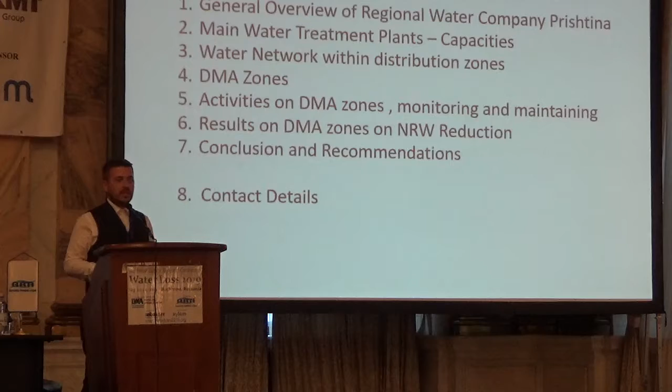As you all know, or somebody may not know, Kosovo declared independence in 2008. We are in the middle of the Balkan region, on the border with North Macedonia, Serbia, Albania, and the rest. As a small country, we are divided into 7 regions geographically, and based on this, the water utilities have also been divided. So the water utilities in Kosovo are only 7, and all of them are regional water companies.

In 2007, we became a regional water company. In 2017, we finished rehabilitation of a water treatment plant in Badovc, and we inaugurated a full construction of a new water treatment plant in 2017. Luckily, since March 2017, Pristina is getting water 24/7, because unfortunately in the past it was not possible to meet the water demand for the capital city and other towns or small cities that we are supplying.

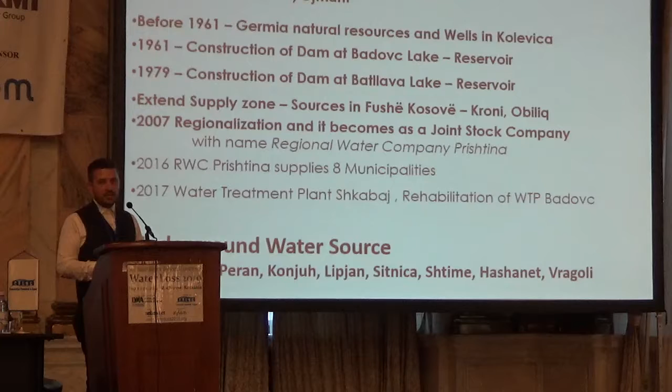Currently we supply 8 municipalities, including the capital city of Pristina. We have quite good coverage with the water supply system. 96–97% of the population within the Pristina region are getting tap water, piped water, and regarding sewage, we are at 88% coverage with the sewage network, but unfortunately we don't yet have a wastewater treatment plant.

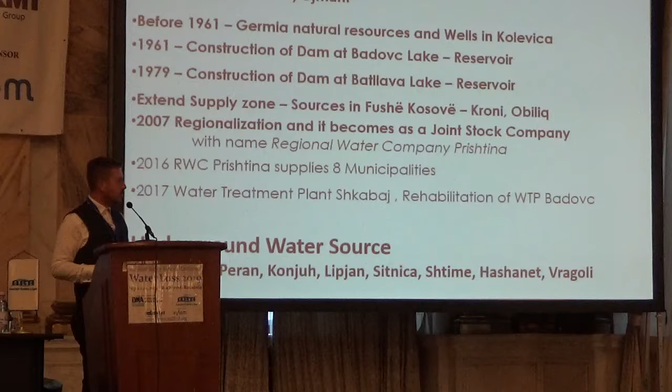As I mentioned, we are using 3 main sources. Gazivoda or Ujmani Dam is located in the north of Kosovo with a volume of 350 million cubic meters. We are importing from this source 700 liters per second. Also, we have Batlava Lake, from which we are getting 900 liters per second, and Badovc, from which we are getting 520 liters per second. So these are the main sources.

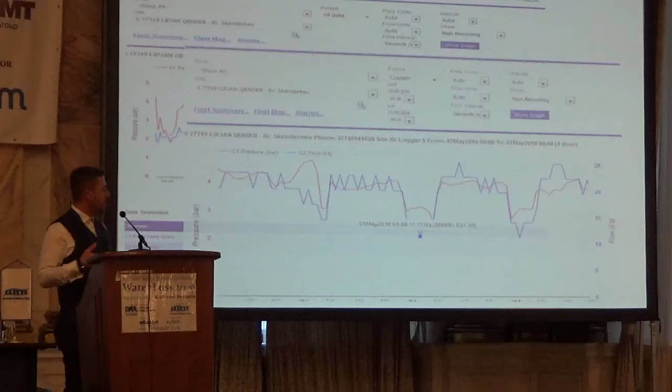Initially, it was 22.22 liters per second. After the steps that we took, within 4 months we achieved 11.11 liters per second. And with this, we were able to define where the minimum night flow is on the chart and where the peak flow or maximum flow is.

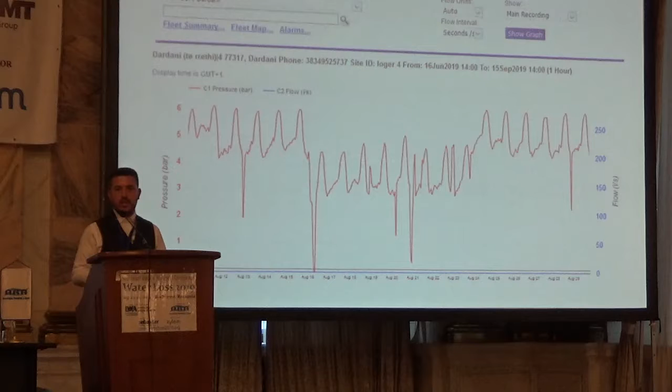Another good experience from online monitoring is also pressure management. When we face troubles in the network, it's quite easier now and quite quicker to find the problem and to pinpoint or to locate. This is one of the cases. It was quite recent, as you see from the date here. It's 16th of June. We had a drop on the pressure after a pipe burst from one of the contractors on the field, and then we start to see.

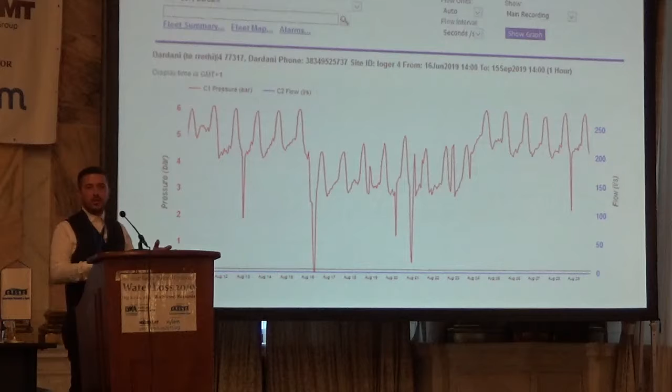So within a week, more or less, we surveyed all the network, and we found out that it was a leak caused close to one of the sewage manholes, but never appeared up, and it was quite impossible to detect even with the noise loggers, because it was a continuous flow into the sewage. What we did, I'm pretty sure that everybody knows much more than I do regarding this one. We were working during the night and trying to pinpoint or to locate the leak.

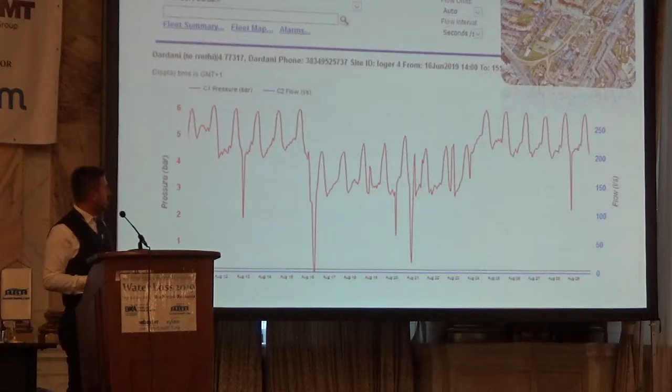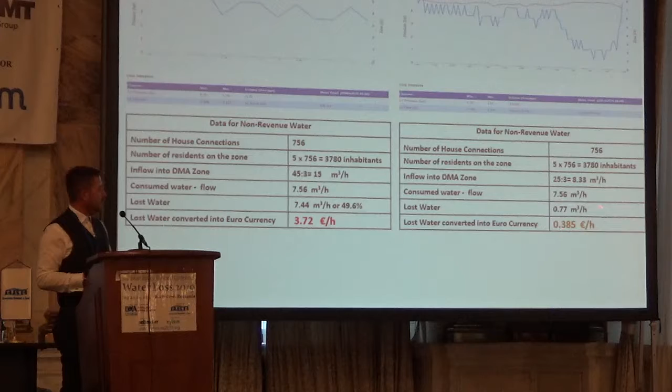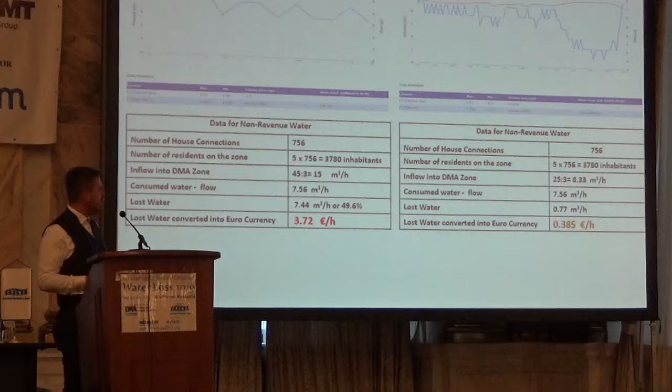So basically, when we started this DMA, we had a loss of 3.72 euro per hour. And after the steps that we took on certain DMA, we achieved to have 0.40 euro per hour lost, and we decreased also lost water. You can see 0.77 cubic meter per hour. And also it's obvious from the chart the minimum night flow. It's quite easy to see and to define it.

What we did, we located. The main problem is house connections, or let's say apartments, multi-story flats connected with zinc steel pipes. Small ones are quite old, and we can see also the roughness, and the pipes are getting burst, let's say, even on the bends. This is what we found on DMA.

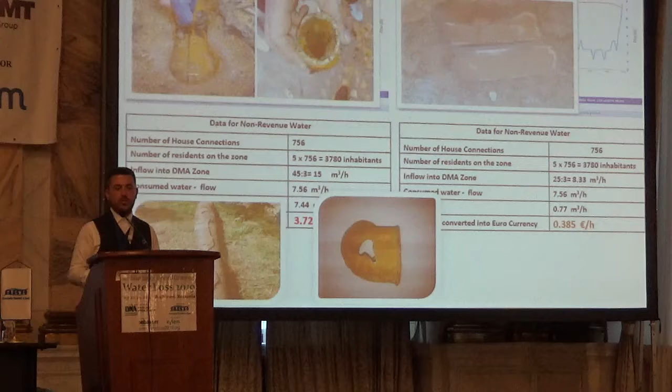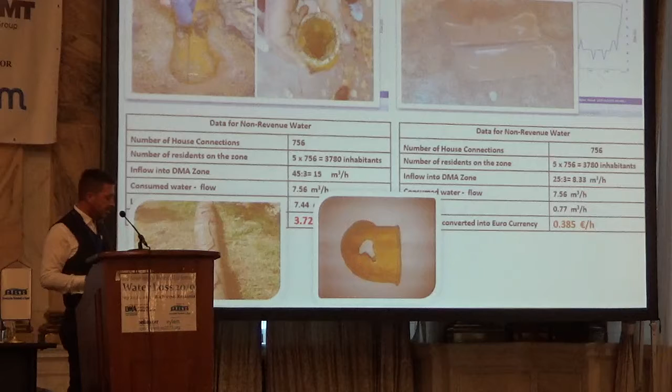Another problem that we are facing is that the water sector after 1999 had a huge development, a huge increase due to a lot of donors that came after the war. But unfortunately, they've installed a lot of materials that were not proper. They were PVC or HDPE, doesn't matter, but they are not withstanding normal pressure, like 10 bars pressure, but they are much below, so the quality of the material is not proper. And we are facing problems also with the pipe burst.

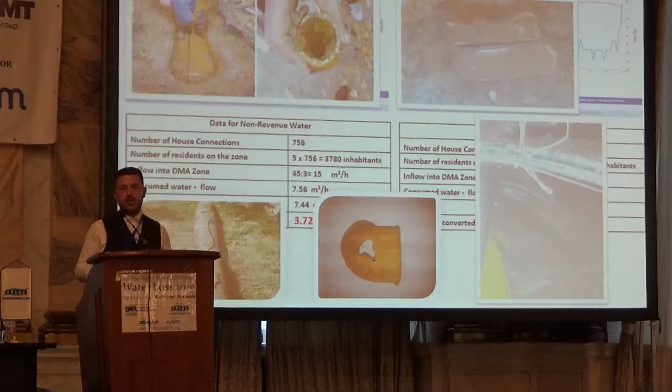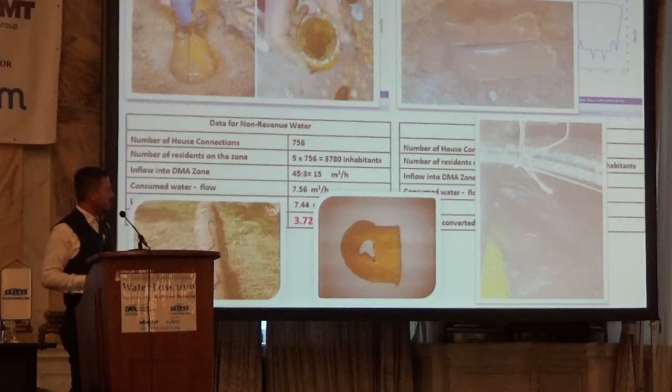Another problem, it's quite foggy because it was zoomed. It's a mixture of infrastructure, so at the same trench, basically we have telephone lines, water pipes, power network, and everything, and it's quite a huge work to do in order to define and to detect these leakages.

As I mentioned, one of the problems that we are facing is in rural areas, because Pristina with its region is covering, as I mentioned, more or less every single village with a rural area, but we are having trouble with the material. This is what is happening. This picture is taken recently, just a month ago.

Due to a high pressure, the pipe is burst, so that's the reason why now we introduced also the pressure management zones. So we are trying to define also pressure management zones and to install new valves in order to define the border and to divide pressure zones. This is caused by a huge pressure, this one caused just by the bad material, but let's say both of them are not the proper material.